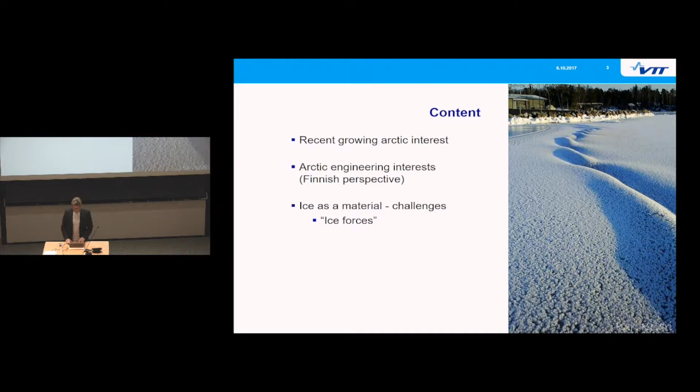But first, I will tell a few facts about Finland. Finland is one of the 8 countries inside the polar circle. Our capital, Helsinki, is located at the same latitude as Anchorage, Alaska, but fortunately it is warmer. Our neighbors on the western side are Norway and Sweden, and on the eastern side there's Russia. But Sweden and Finland are different from other Arctic countries compared to, for example, Norway — Finland and Sweden don't have access to Arctic oceans or Arctic seas. So in that sense, it's quite different.

The challenge in Northern Europe is that the Baltic Sea freezes during winter. The striped area shows the Baltic Sea, so it means ice conditions must be taken into account when building offshore structures. As these figures show, it really varies how much ice there is in different years, but the coastline of Finland and the northern part of the Baltic Sea is always frozen.

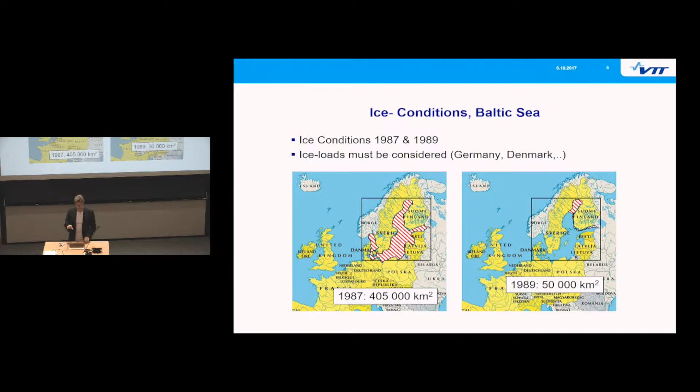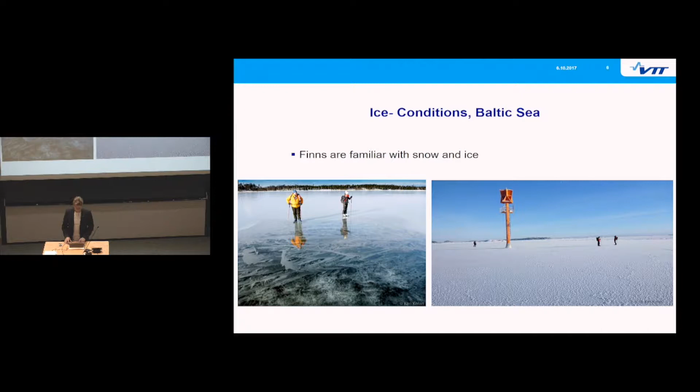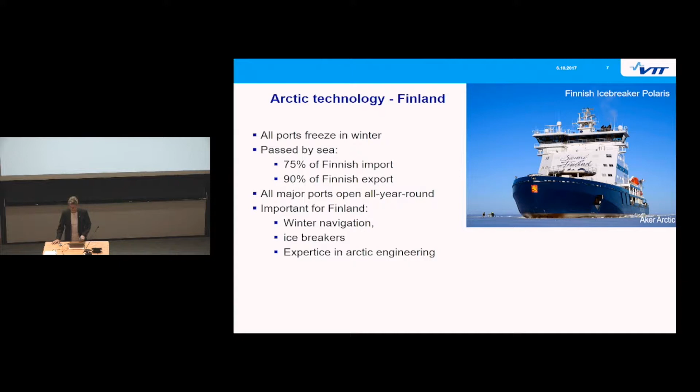But luckily, Finns like ice and snow, so skating on sea ice, like in these pictures, is quite common. And snow, we like. Because of the ice cover, all the ports freeze during winter, and that's a challenge because the majority of Finnish import and export passes through the Baltic Sea. Therefore, it's really important that all ports are kept open all year round. For this reason, winter navigation, icebreakers, and Arctic engineering have become important in Finland.

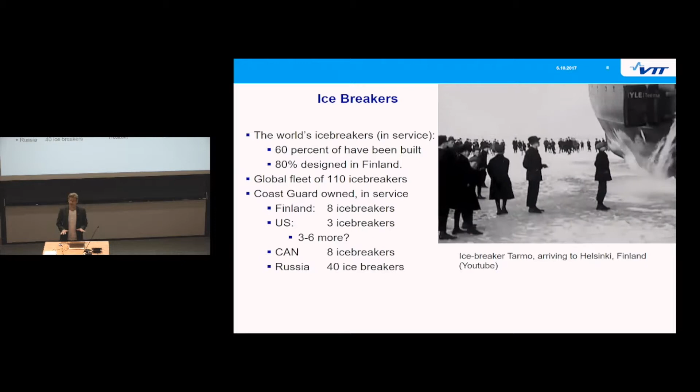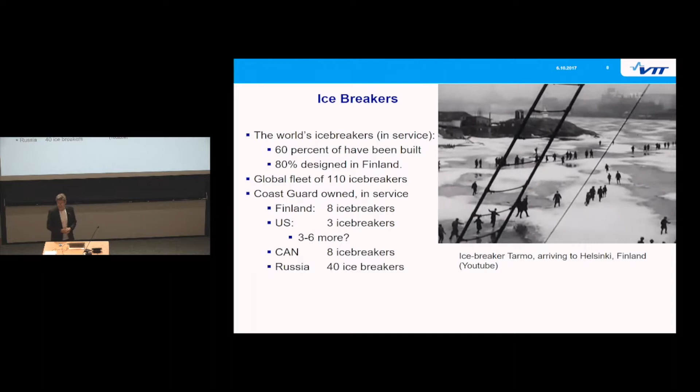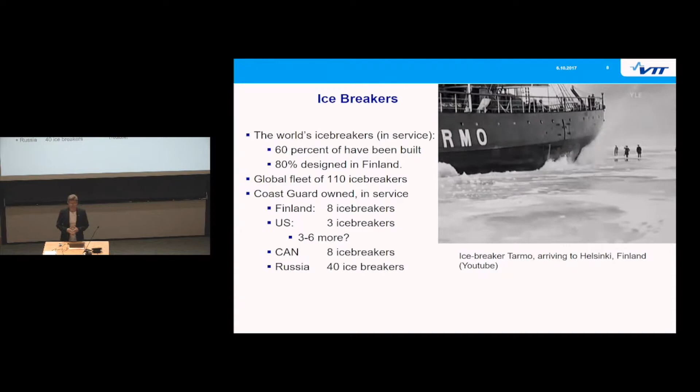In fact, most of the icebreakers in service today in the world have been built in Finland or designed in Finland. This video was shot about 100 years ago in Helsinki, showing the icebreaker Tarmo arriving at Helsinki harbor. As you can see, safety regulations at that time were different. The ship itself had steam engines, 4,000 horsepower, but most importantly, it needed 4,000 kilograms of coal per hour, so there were a lot of men shoveling coal to keep it running.

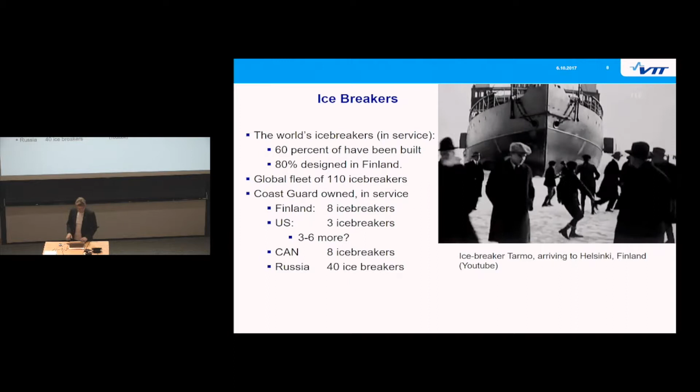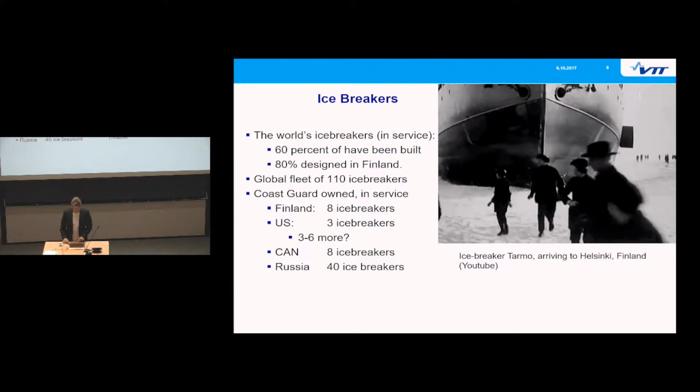The global fleet of icebreakers is about 100. To get an idea about icebreakers in different countries: Finland has 8 icebreakers, the US has 3, Canada has 8, and Russia has 40. But there has been discussion that new icebreakers will be built for the US Coast Guard.

The Arctic Council was established in 1996. It's an intergovernmental forum promoting cooperation and coordination among the 8 Arctic states, and currently Finland is chairing the Arctic Council. In 2013, at the Arctic Council meeting in Sweden, things somehow changed — Arctic matters got more interest because 6 new permanent observers were accepted to the Arctic Council. Especially the interest of Russia and China has increased.

One reason for that interest is that, according to the US Geological Survey, more than one-fifth of the world's undiscovered oil and gas is in the Arctic. As the figures show, most of that is in Russian territory — about half of undiscovered oil and gas is in Russian territory. So Russia is quite an important player in the Arctic because of energy.

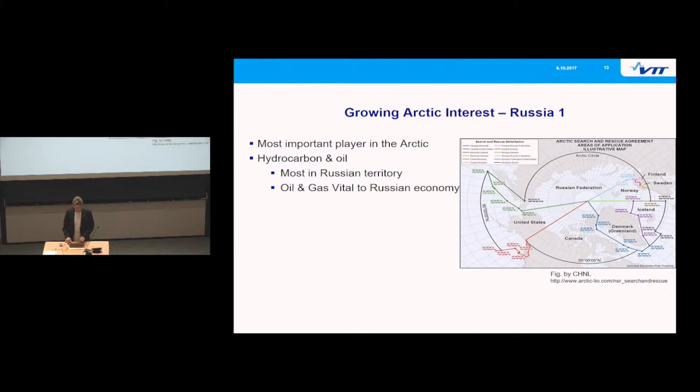Oil and gas is vital to the Russian economy. It forms a remarkable share of Russian GDP, and in fact, 1/3 of natural gas imported to Europe comes from Russia, so it's important for export. But there's a challenge: according to research, the western Siberian sources are slowly drying up, so new fields are needed, but the offshore fields are extremely difficult.

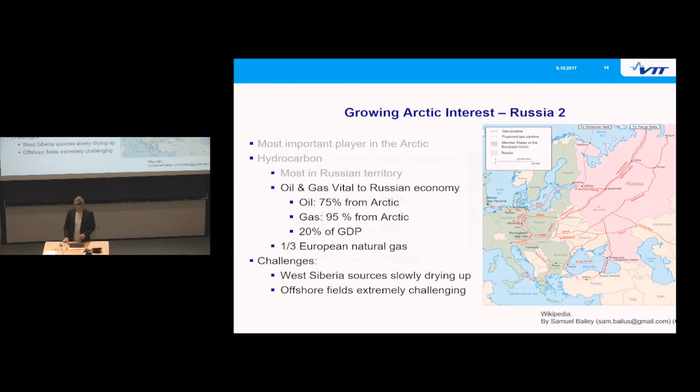So in order to access, exploit, and deliver resources to markets, Russia has planned to invest in the Northern Sea Route. This means big investments in infrastructure, not only ships but also ports, icebreakers, oil spill response, and other things. But in addition, there's also a growing security interest in Russia, so ballistic missile submarines are located in the Arctic area.

China is also preparing for the opening of the Arctic sea routes. The Northern Sea Route would shorten the shipping time from China to Europe, and importantly, it would provide a second alternative if there's some kind of crisis going on in the Suez Canal. The Northern Sea Route would also give access to Russian hydrocarbons and perhaps to rich fishing areas in the Arctic.

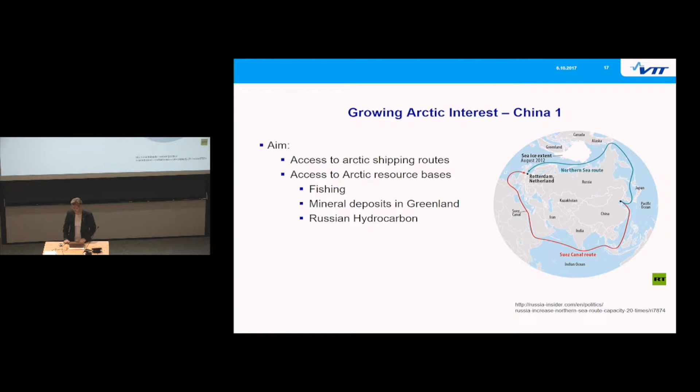What are the Chinese actions? China has been active in forming bilateral agreements with Arctic countries, and they have also invested a lot in national Arctic research. They strongly promote international cooperation with Arctic countries, invite foreign researchers, organize seminars, etc. I myself was in China one year ago for one month.

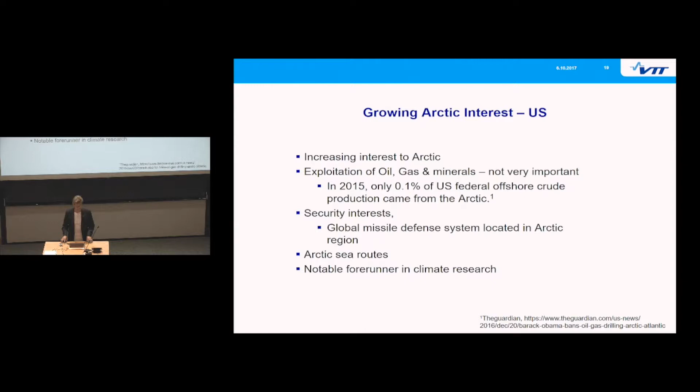US attention to the Arctic has been a bit limited. Arctic natural resources are not as important to the US as they are, for example, to Russia. But there are also security issues for the US because the global missile defense system is located in the Arctic, and the US is also interested in the possible northern sea routes in the Arctic. The US has been a notable forerunner in climate research.

So that was the first part.

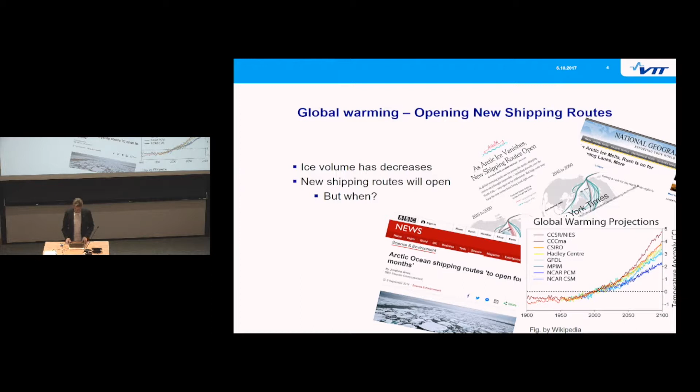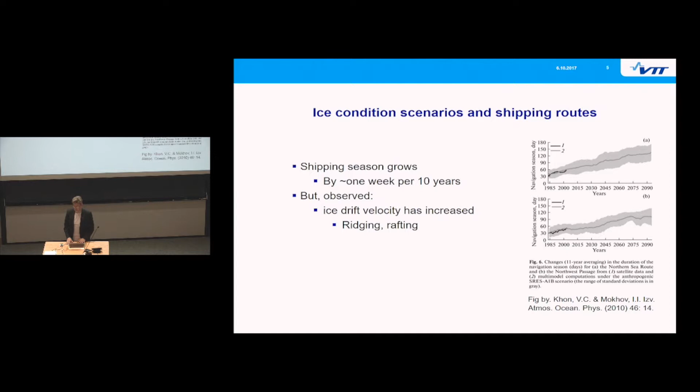Now, about Arctic interest from the Finnish perspective. One thing I want to point out is the timescale related to the opening of the Arctic. When I read newspapers, I easily get the impression that Arctic shipping routes will open pretty soon, but that is not the case. Based on global warming models, a rough estimate is that the shipping season grows one week per ten years, so after 40 years we will have one month more of shipping season. So the timescale might be different than the impression we get from newspapers.

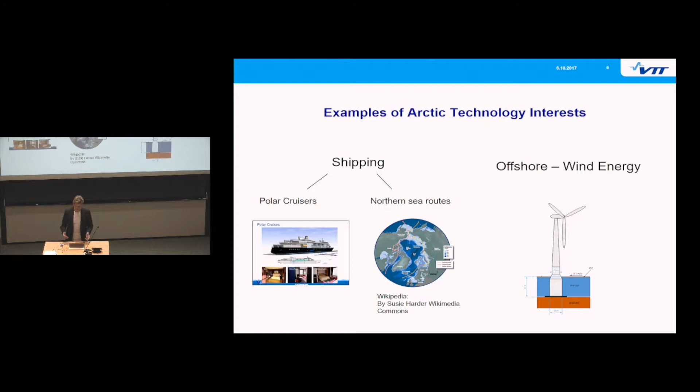Examples of Arctic technology interests from the Finnish perspective include, first of all, shipping and also offshore wind energy. In shipping, there are two different things: polar cruises and the Northern Sea Route. There's an increasing interest in polar cruising. Nowadays there are 80 vessels in the market for these polar cruises, and they expect that capacity will increase by 40% within the next 2 years.

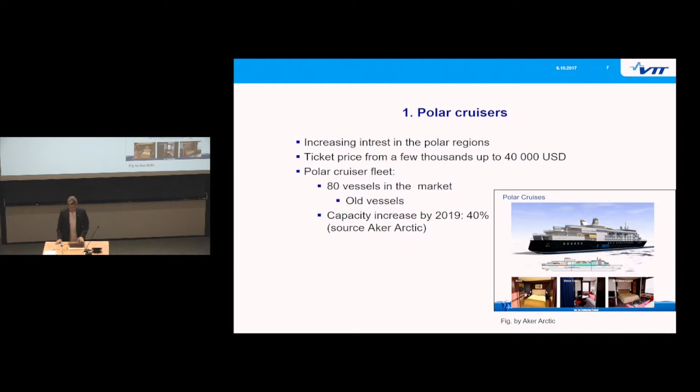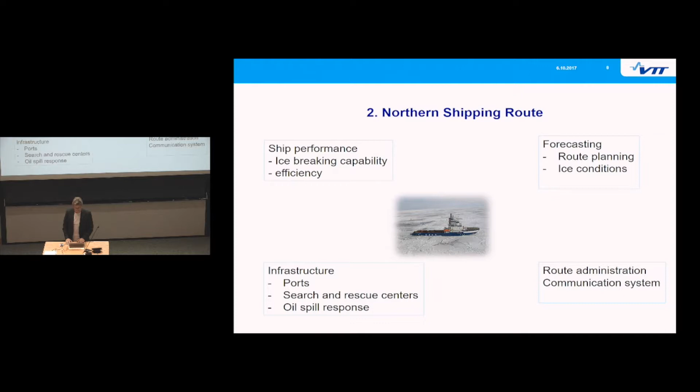The northern shipping route isn't just about icebreakers. To build up the sea route, you need a lot more different kinds of infrastructure, like I already mentioned: ports, oil spill response, search and rescue centers, but also we should be able to know what the ice conditions are, to be able to do ice forecasting, route planning, etc. All these things have to be solved before starting the northern shipping route.

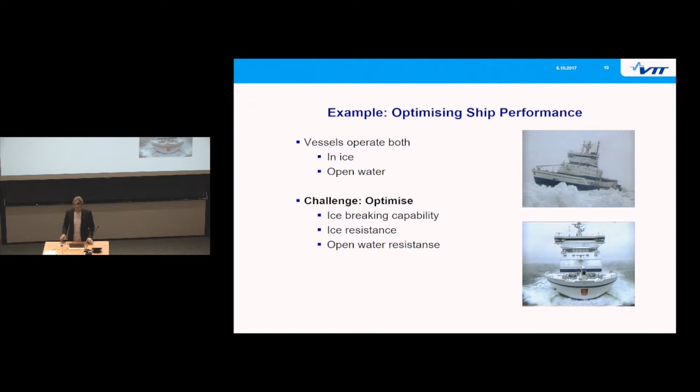But one thing I want to tell you about is ship performance, because the idea is so simple, but it's so good. All vessels, icebreakers, they have to operate both in ice and in open water. The problem is that you should optimize both ice breaking capability and open water resistance, and that's not easy.

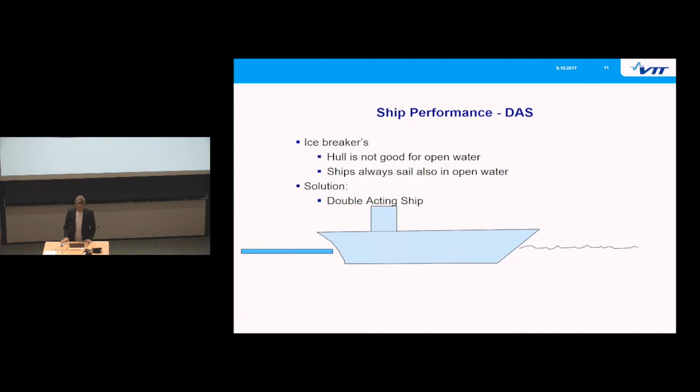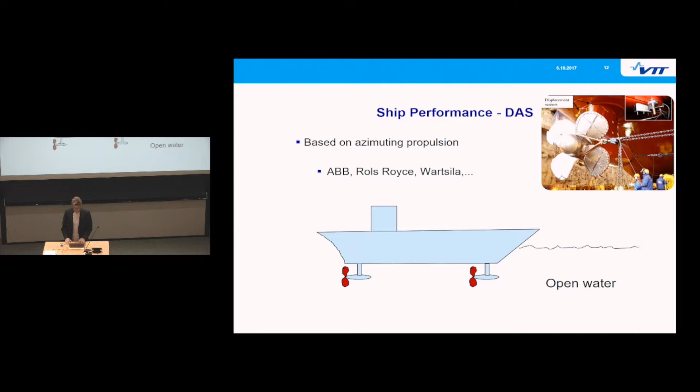But there's a simple solution: the double acting ship. It's based on the existing azimuthing propeller system, propellers that you can rotate 180 degrees. There are a lot of these systems available, from ABB, Rolls-Royce, Wärtsilä. The idea is that the ship goes forward when it's on open water, and goes backwards when it's breaking ice, so it has different shapes in backwards and forward. Isn't it simple?

The second thing I want to talk about is offshore wind power. It might be hard to believe that they are building wind power in ice-infested waters, but that is going on.

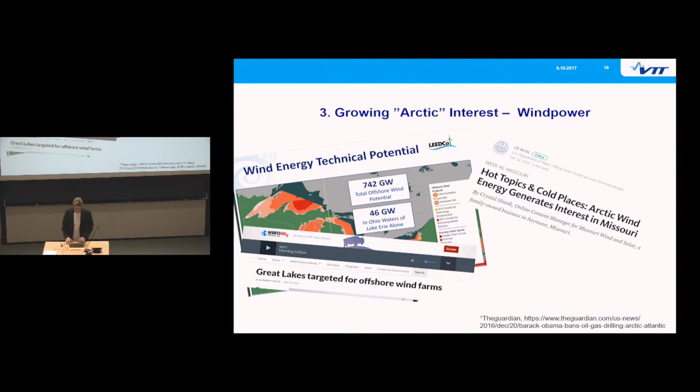The reason, in Europe which I know better, is that onshore wind power has been saturated. In Germany, UK, Denmark, people don't want more windmills in their backyard. So the solution is to go offshore.

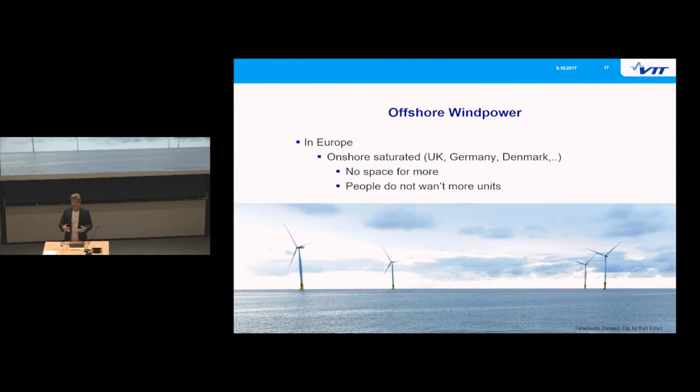The challenge offshore is that there are higher foundation costs. In Finnish coasts, the foundation costs are 3 times onshore because of the ice conditions. But on the other hand, there are better wind conditions and less space needed.

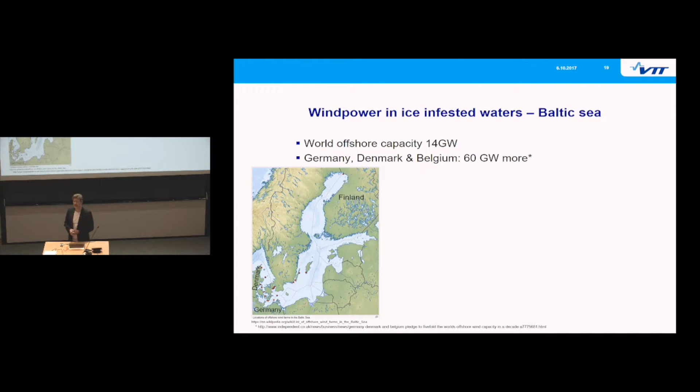Recent plans: if we think offshore wind power capacity in the world is 14 gigawatts, Germany, Denmark, and Belgium have planned to build 60 gigawatts more. So it means thousands of units of offshore wind power.

And at least some of them will be built in the Baltic Sea, which is, as I told, frozen now and then. In Denmark, it's about 1 time in 7 years that the sea is frozen. So it's a challenge.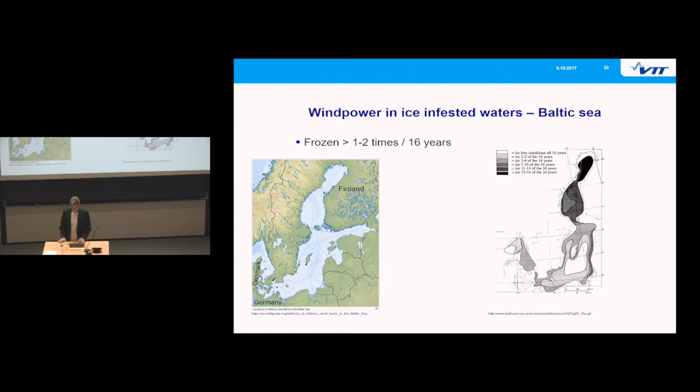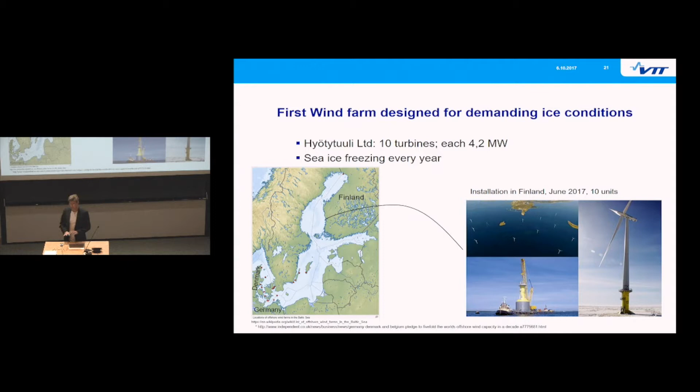This year, the pilot wind farm was installed on the west coast of Finland: 10 wind turbines, each 4.2 megawatts, and it's the first wind farm built in real severe ice conditions.

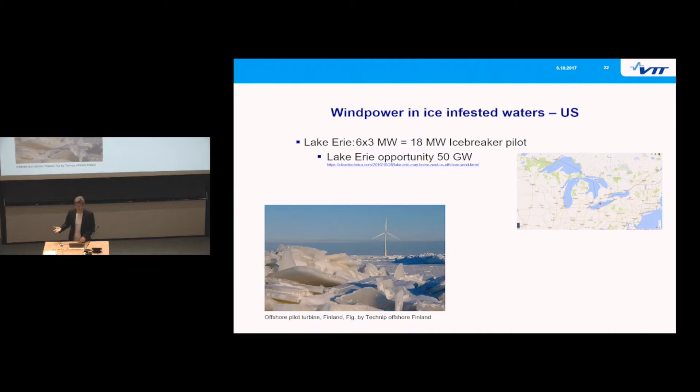But also in the US there are plans to build wind power. There's an icebreaker pilot project planning to build 6 3-megawatt wind turbines in Lake Erie. The capacity, based on wind conditions, of Lake Erie is 50 gigawatts.

Because of the tide and wind, ice drift velocity can be up to 1.2 meters per second. And it's really, really challenging for ice engineers.

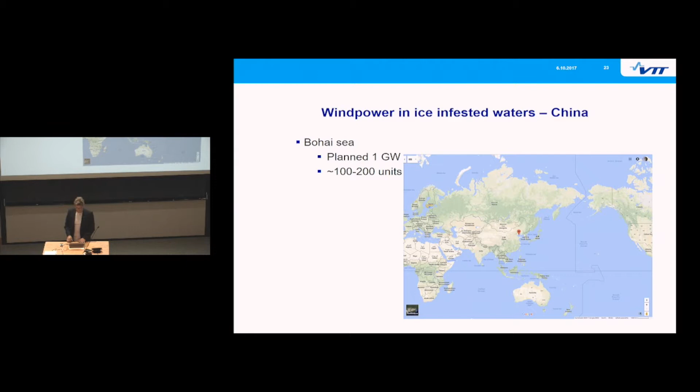The last part I'm speaking about is challenges related to ice, and ice forces are in the focus. There are ice forces which have to deal with ships, but I'm concentrating on the fixed structures.

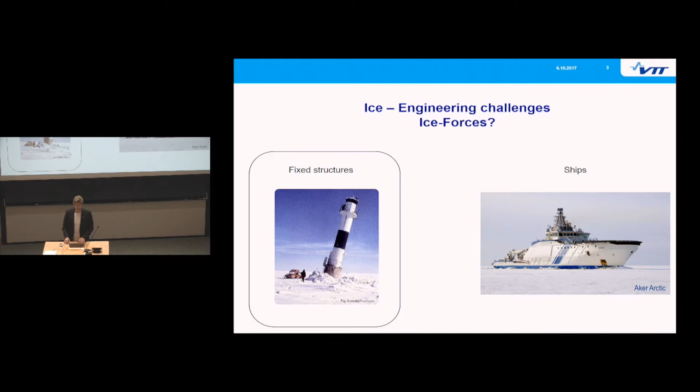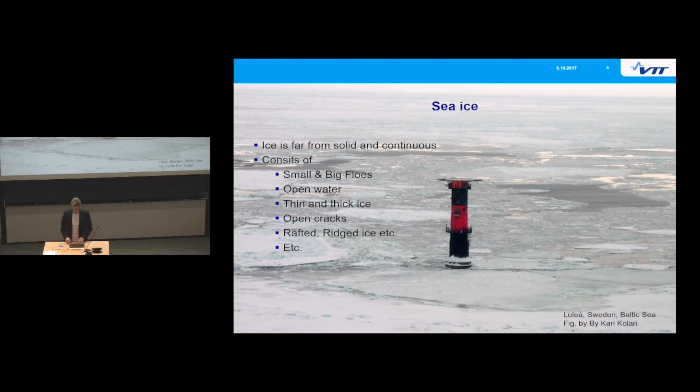The first thing is to realize that sea ice is not a constant smooth layer of ice. There's always cracks, channels, open water, ice of different thickness, big and small floes, possibly multi-year ice, ridges, icebergs.

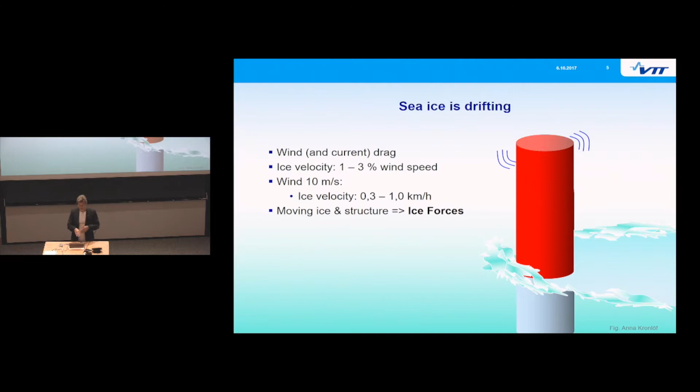The important thing is that the sea ice is drifting, because of the current and wind. If there's only wind, the drift velocity of the ice is about 1 to 3% of wind speed. When this drifting ice interacts with a structure, there will be ice forces.

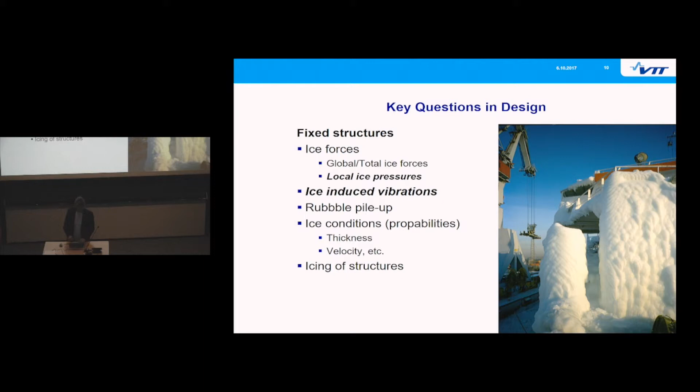So structures prone to ice loads are offshore wind power units, lighthouses, bridge piers, oil platforms, etc.

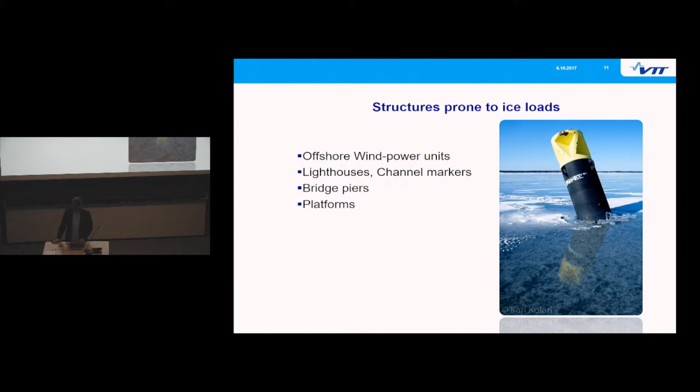This is an example. We were doing measurements. This is a lighthouse in the Baltic Sea close to the Swedish coast, and we were measuring ice forces.

The lighthouse was covered by force measurement panels. We were measuring forces for about 5 winters.

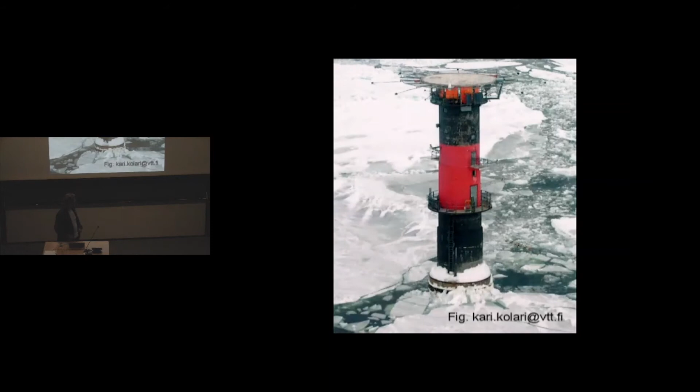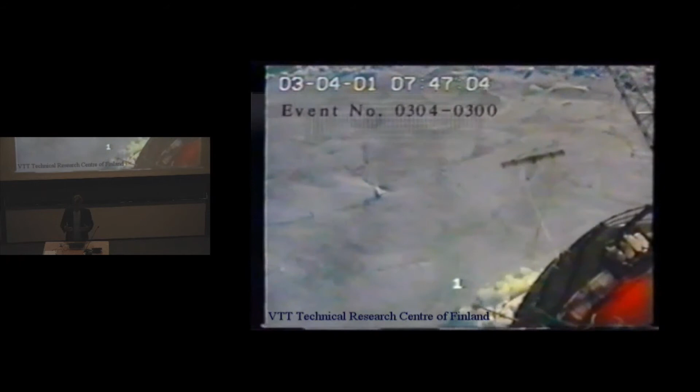And this is showing what happens there. So this is a lighthouse, and you can see ice drifting against the lighthouse, it's breaking, and sometimes it might start to build up like this.

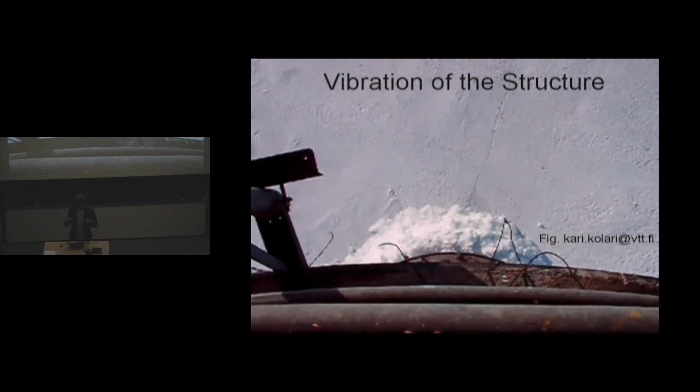This is a vibration of a lighthouse. I took the film holding the camera against the rail, so I'm not shaking, but the lighthouse is shaking. It's vibrating while ice is crushing into small and big crushed particles.

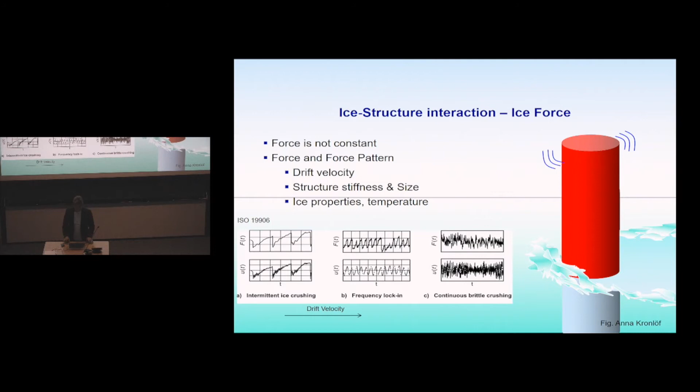The big challenge in defining ice forces is that the ice force pattern, how it looks, and the force level is a function of ice velocity and structural properties, like stiffness of the structure. But the physics of interaction is not well known yet. Therefore, force predictions given by ice experts are scattered widely. It's quite evident that further research is needed.

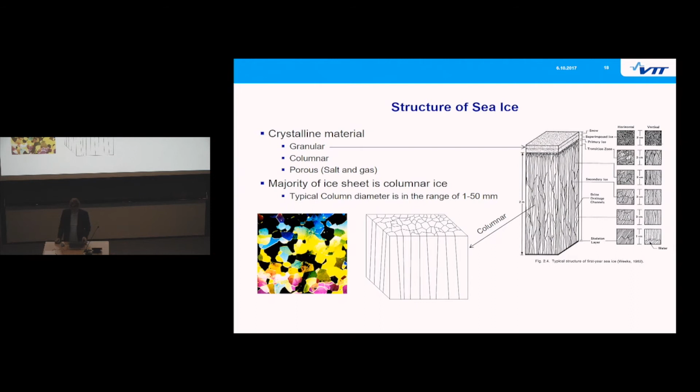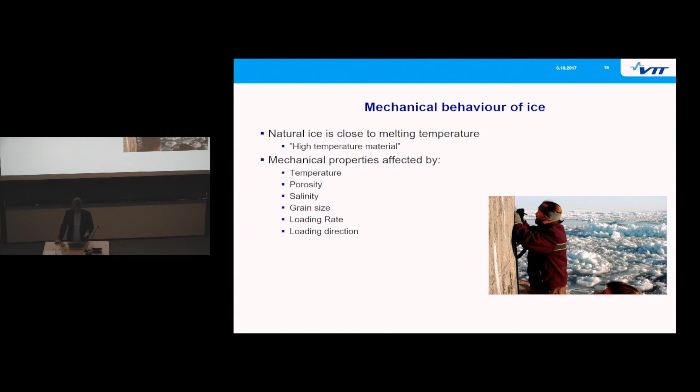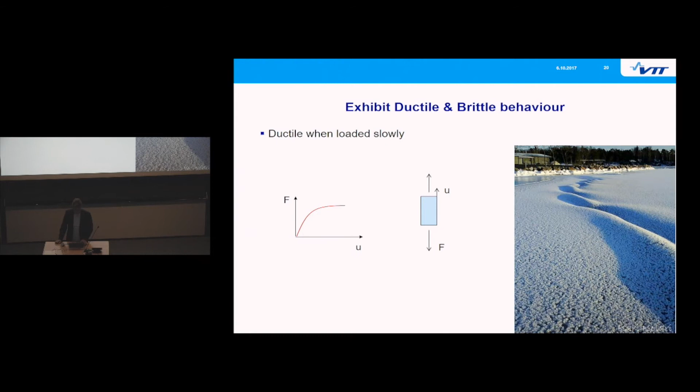Ice can be considered a material at high temperatures because it's so close to its melting temperature. Temperature and grain diameter significantly affect the behavior and strength of ice. We know ice can exhibit both ductile and brittle behavior. It's ductile when loaded slowly, and brittle when loaded at a higher rate.

The challenge is that the micromechanical behavior is not completely understood. Ductile behavior is maybe better understood, but brittle behavior is not completely understood. But what we know is that cracking at the grain size scale is highly important in this process.

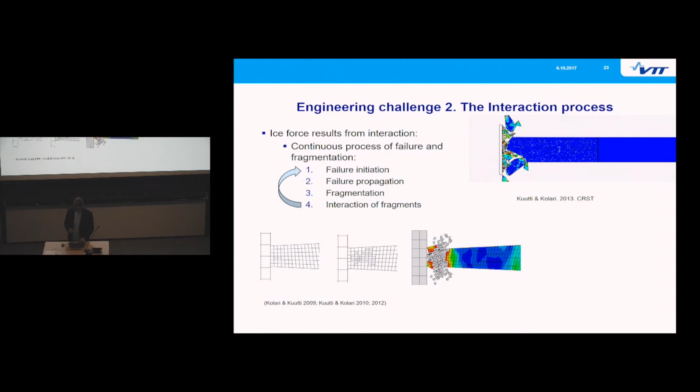The second challenge in determining ice forces is that the force is a result of a continuous breaking process. It's not that we just solve when the first crack starts - we have to solve crack initiation, propagation, formation of fragments, and interaction of fragments with other fragments, with the structure, with virgin ice. So the process itself is really difficult to simulate, and this process keeps going on.

I will introduce a model which can be used in simulations of ice failure. It's called the sliding wing crack model. Some of you have heard about it already. The mechanism itself has been studied a lot at Dartmouth College.

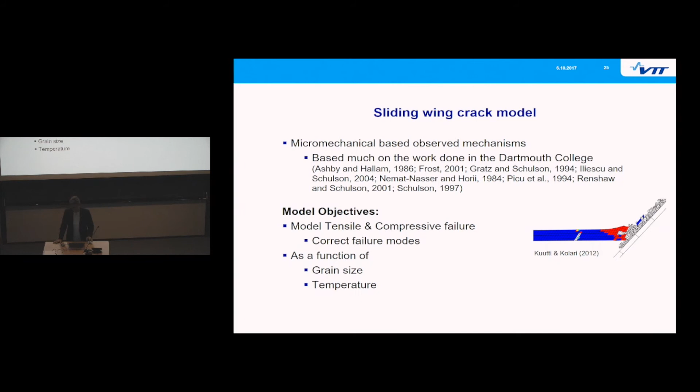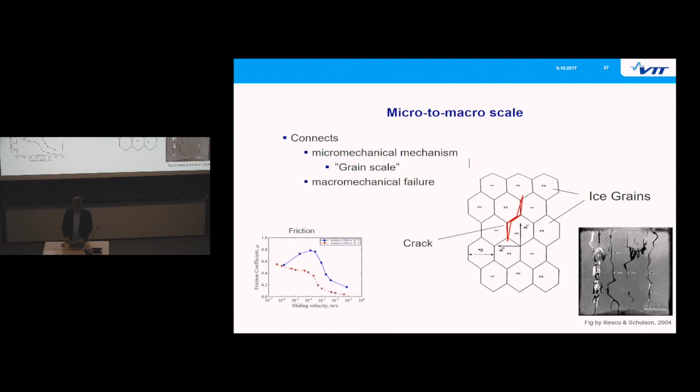The model connects grain scale mechanisms to macromechanical failure, and the so-called axial splitting failure mode is in the key role. So I will shortly describe the mechanism.

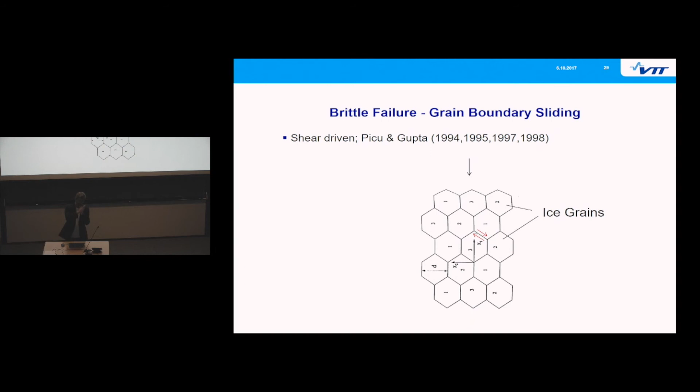Let's consider compression of granular ice. Under compression, the grain boundaries start to slide, and because of the sliding, a crack will be formed. The crack can be intergranular or intragranular, and the crack size is in the range of the grain diameter.

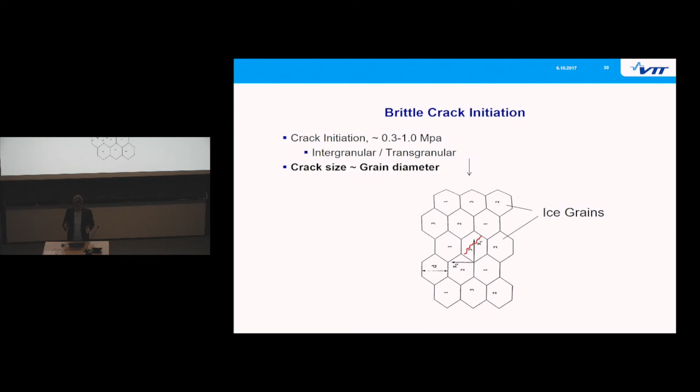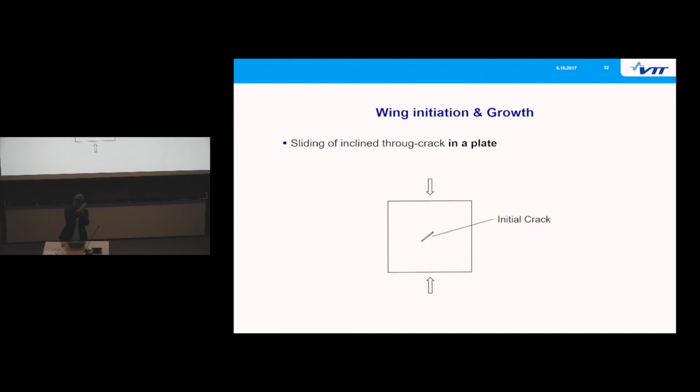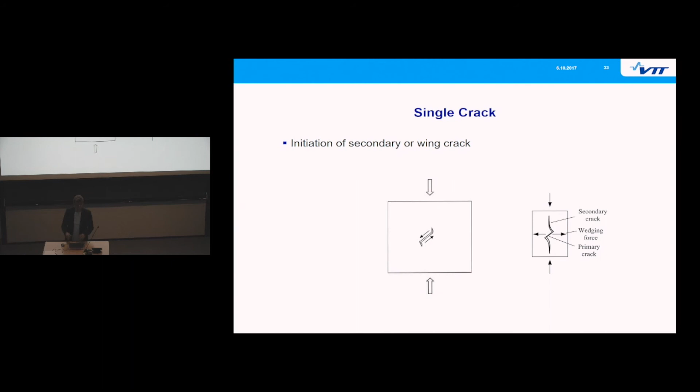Let's look at how the crack behaves. Under further compression, the faces of the crack slide, and after some sliding, at the ends of the sliding crack, wings start to form. After further compression, the wings grow and finally break the specimen. The key thing is that the frictional sliding - the friction between the crack faces - has an important role, and friction is a function of temperature and sliding velocity.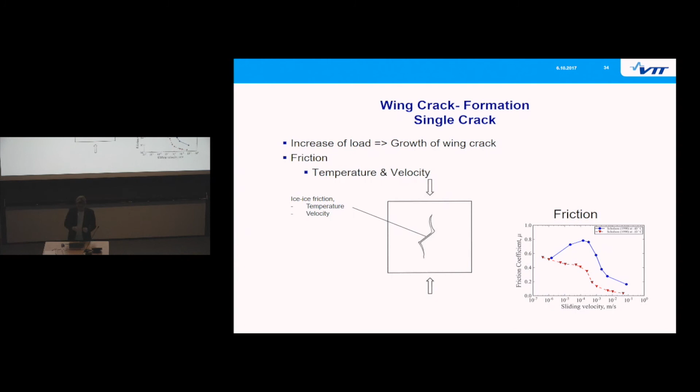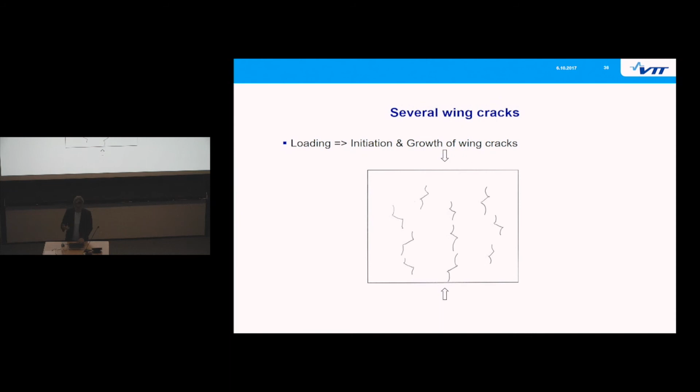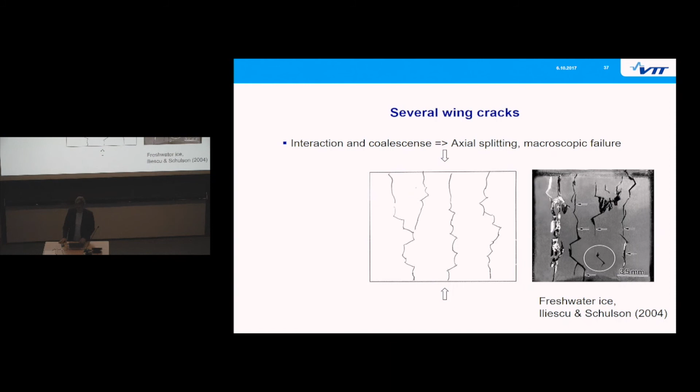If we look at a specimen with several cracks, the same mechanism works. Initial cracks start to grow, and they coalesce and split the specimen, as illustrated in the figure from Iliescu's and Schulson's experiments.

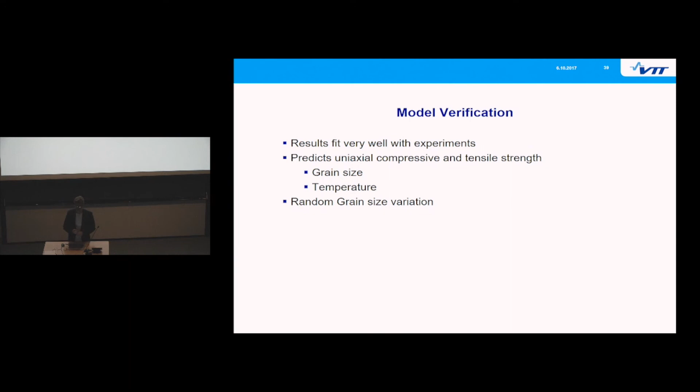Using Abaqus software, this shows simulation of the axial splitting failure mode when ice is failing in a brittle manner. In general, the results fit very well to the experiments. It predicts ice strength as a function of grain size and temperature.

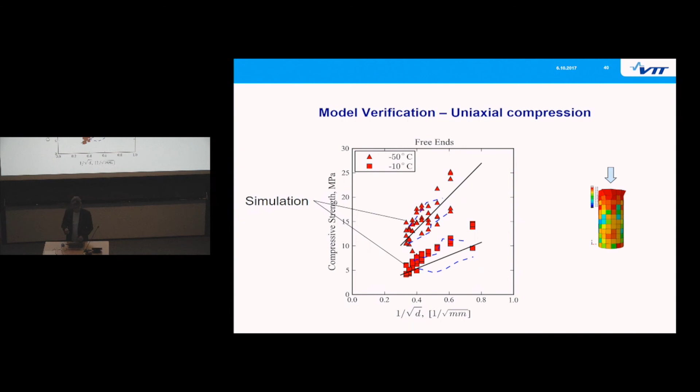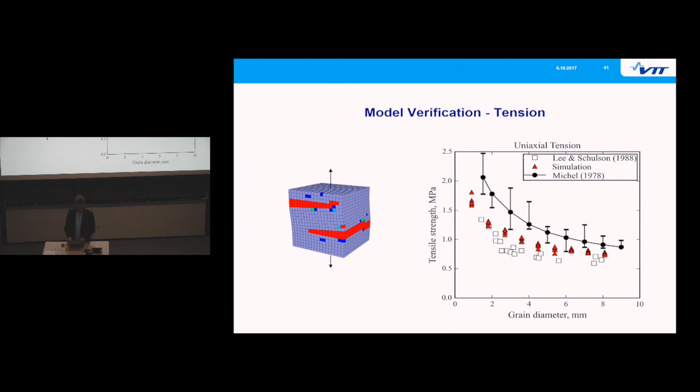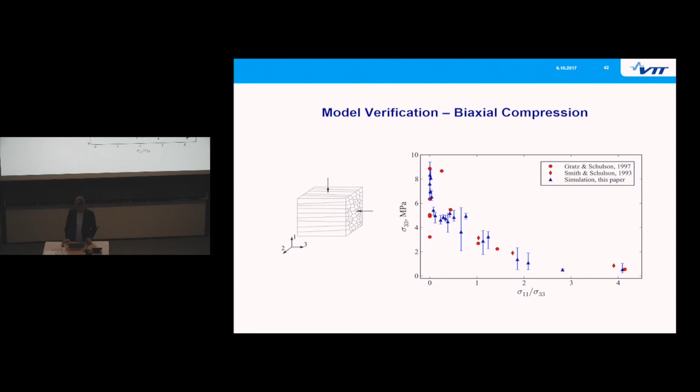This is the simulation under tension - the red triangles are simulation results, and the other markers are test results. Then under biaxial compression of columnar ice, the red ones are test results and the blue ones are simulation results.

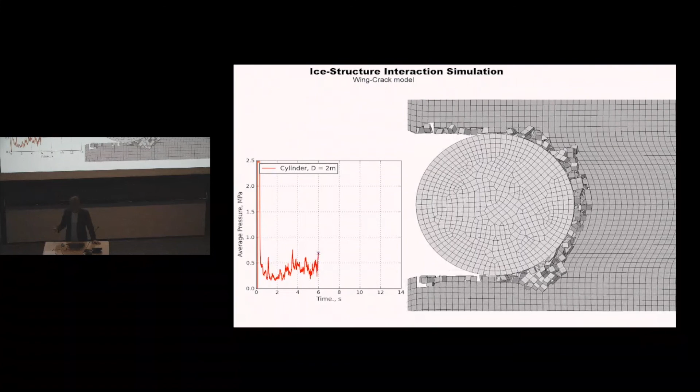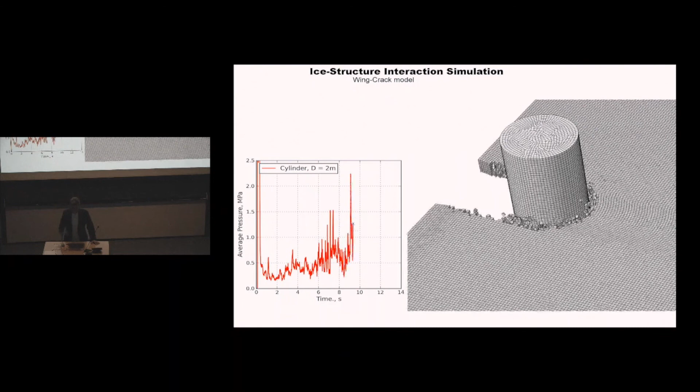So it works well at the small scale, and I adopted it at a larger scale. This example shows simulation of ice-structure interaction. The structure here is moving, it's compliant - now it's stiff, showing ice crushing against the structure. And this is important.

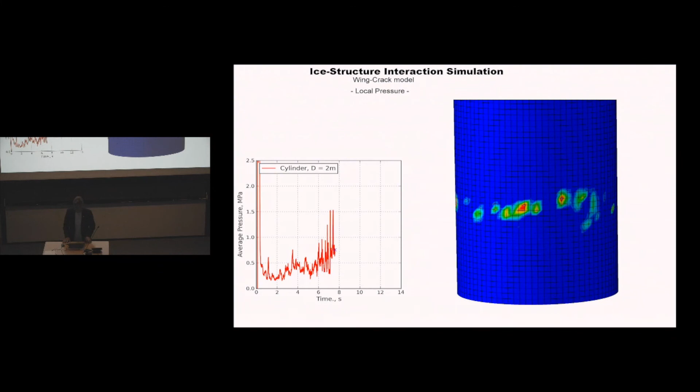We know from experiments that when ice is breaking, there are so-called high-pressure zones, which keep changing places. This model can predict those high-pressure zones too, which designers are interested in. Well, that concludes my presentation. Thank you for your attention.